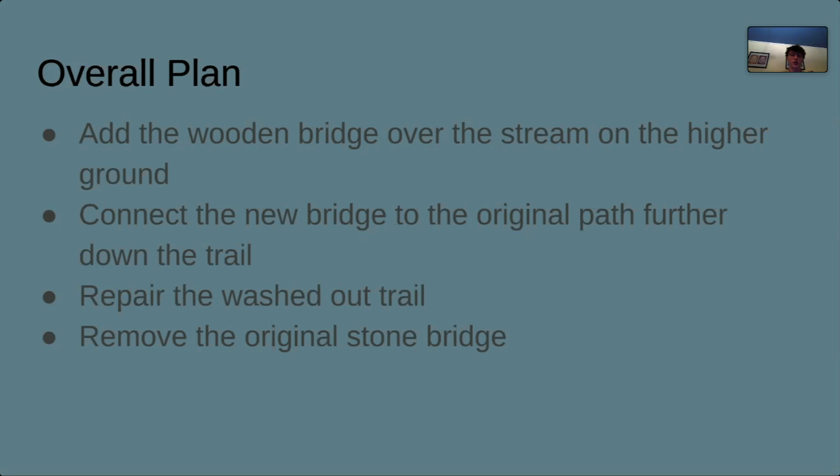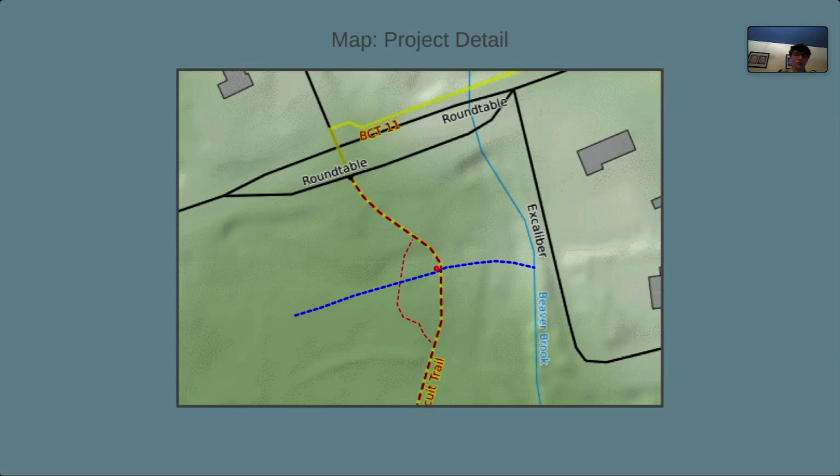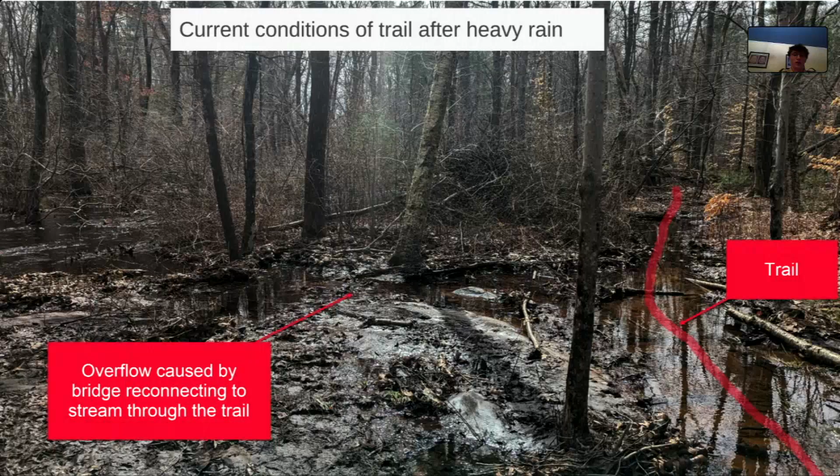This is back to the old picture, just roughly where my bridge would be placed. And this is from where our bridge is going to be placed.

We'll have footings on every spot where there's going to be new stringers placed in to support those. We'll have the gabion connected to these footings by rebar, and then the gabion will be set a decent bit into the ground to make sure it stays on sturdy ground, not just the nutrient-filled ground.

And it's not going to be placed on the actual banks. It should just be staying on where it's been flooded. And once we remove the old stone bridge, that shouldn't even happen anymore because it shouldn't be flooding.

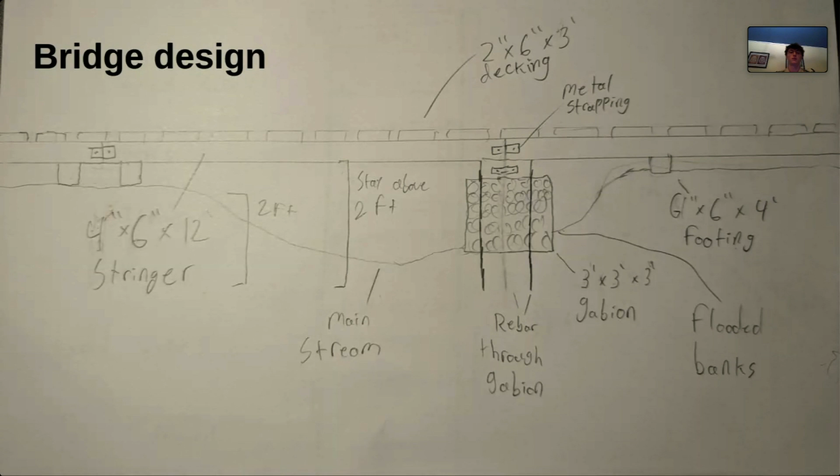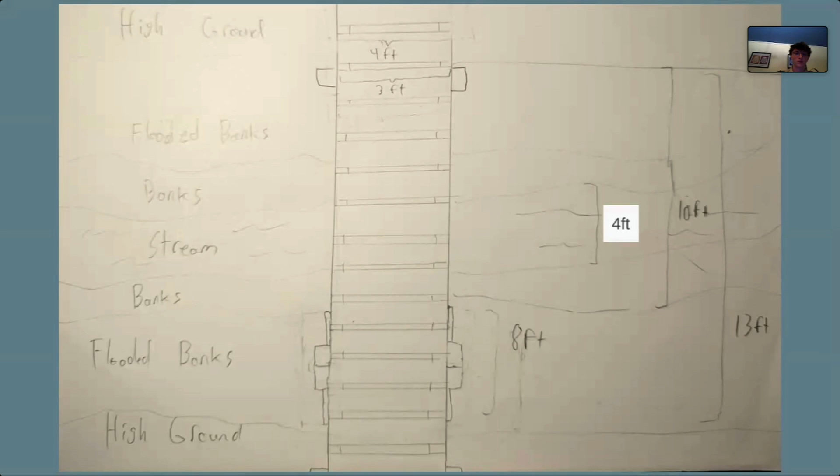We'll be trying to help connect and repair the trail. Because the original trail has been destroyed, I'll have to create a short section. It shouldn't be too far, we won't have to change much of the terrain.

To repair the old section that's been washed out, we'll just be covering it with stuff from around the area, like sticks and logs, to try to let it grow back on its own, unless you want me to do something specific with that area.

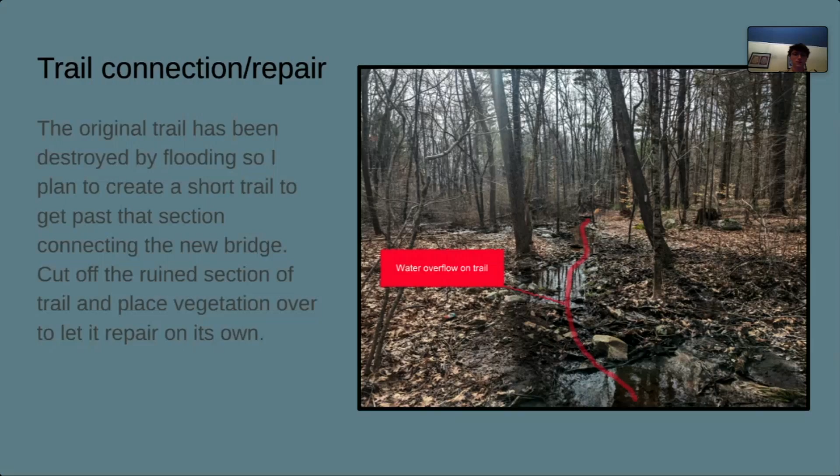To deconstruct the bridge, we'll try to use a block and tackle to remove the much larger rocks, because there are some pretty heavy rocks. And if that doesn't work, we'll use a pry bar or a hammer to try to get them out of the way and then wheel them away.

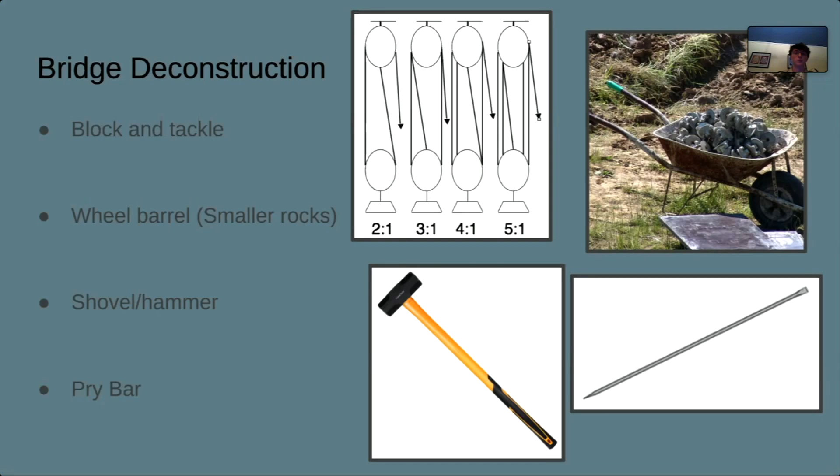Are there any questions?

Thank you, Nate, that was a really comprehensive presentation. My questions were really mostly about the schematics last time we saw you. Thank you for putting that together. I think I understand what you're proposing, and I think it's much needed in that area.

Jennifer, any staff comment on this? No, it's an excellent project. That existing stream crossing, where the bridge is just too small, is backing up all the water and causing a lot of erosion. So this is very much needed, and we appreciate you taking on this project.

Comments or questions from other members of the commission? Any public comment here for 10R Roundtable Road trail repair? All right, seeing none, I'm going to make a motion to close the public hearing for 10R Roundtable Road.

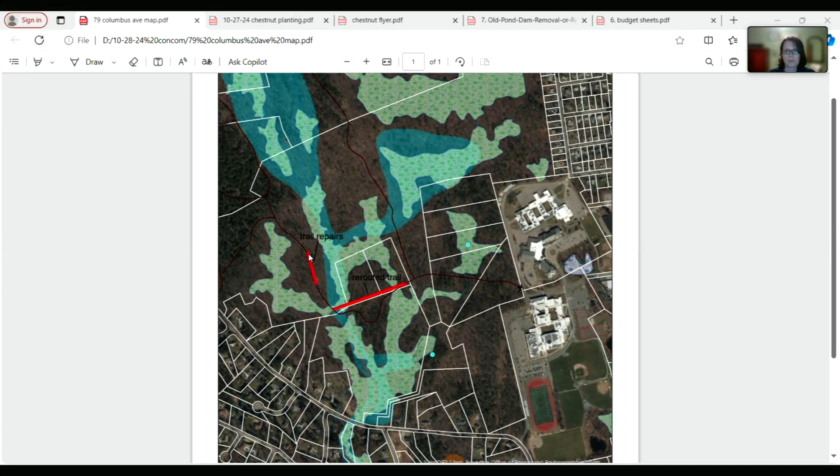This is the section where we'll need a machine to help us, and there's another section closer to Randall Street where it's really muddy. So we need either some boardwalk or puncheons, something to help people stay out of the water to prevent the creep happening on the side. People don't want to walk in the mud and they keep edging out further and further.

So those are the two projects for us.

One bucket at a time or trailer? Well, we can allow temporary motorized access with small vehicles to do the work. We've done that on occasion with a number of the scout projects, just to get the materials there, and after that it's back to non-motorized. Yeah, no, it's needed here. I was more just curious.

Questions or comments from other members of the commission? I think this will go a long way towards making that a little bit more accessible.

Any questions or comments from members of the public? Anybody? Nope. Okay, all right, seeing none, motion to close the public hearing for 79 Columbus.

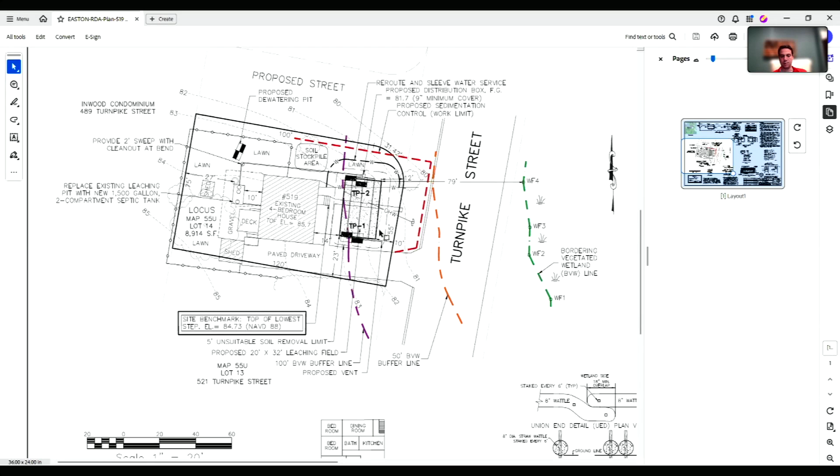Questions, comments from other members of the commission? All right, seeing none, any public comment here for 519 Turnpike?

All right, seeing none, motion to close the public hearing for 519 Turnpike Street. Carol motion, Vecchio second, roll call vote. Benson, aye. Carol, aye. Rossman, aye. Spady, aye. Vecchio, aye.

Motion for a -2 and -3 under the Wetlands Protection Act and a -3 under the bylaw. Carol motion, Vecchio second, roll call vote. Benson, aye. Carol, aye. Rossman, aye. Spady, aye. Vecchio, aye.

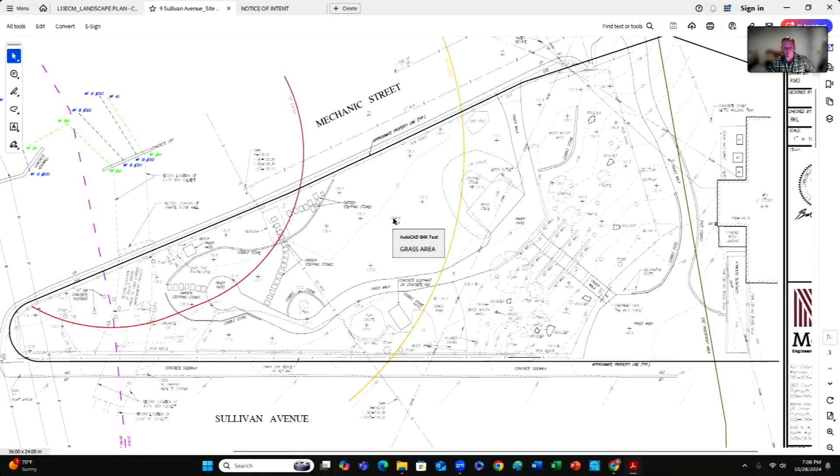When we add degraded riverfront, we have to mitigate that, and that was kind of a challenge in the beginning. We were able to put some draft plans together, and Jennifer took a lot of time and helped us craft the design we're at now. It sounds simple, but when you're adding a playground surface, is that degraded, or do you need wood mulch, or soil? That was the challenge we wound up with. So that's the existing conditions plan.

Let's see, this is the proposed conditions plan. Mainly the main walkways are staying, with some revisions to stone pathways. The playground equipment is now proposed, which would be on a wood chip mulch and soil underneath, so that doesn't create a new degraded area.

But one other aspect that was more difficult, but a great site improvement, is that we need to control the stormwater on the site. So there are 2 rain gardens proposed, one here and one here, that would all use native plantings, and also a roof infiltration system here, which is also going to collect the roof water runoff from the building and infiltrate it into the ground.

So we are improving the stormwater on the site, because this isn't an exemption. It's not a single family home. It's more commercial playground, but we still have to meet the Massachusetts stormwater standards. So we have done that.

All the plantings on the site are proposed to be native, and I'll bring up the landscape plan. So there is approximately an increase of approximately 2,055 square feet of new degraded riverfront that consists of areas that don't contain topsoil, so new hardscape.

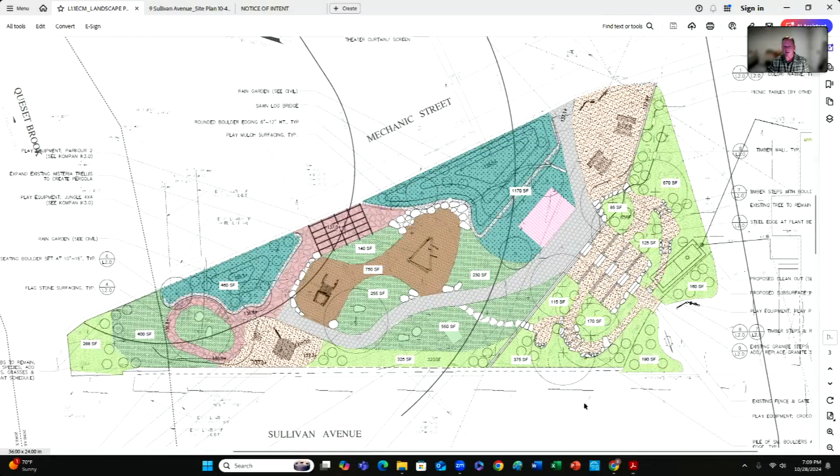Can I just ask, in the rain gardens, is that being counted towards mitigation? It isn't. We have the 2-to-1 ratio plantings to make that in compliance. I included the stormwater as an improvement, just a general site improvement, but not something that we're counting for to comply with the riverfront regs.

Okay, really appreciated the notes on redevelopment as well. Sure.

So, Nick, could you walk us through stormwater? Yep. So Nick Courtney with Merrill Engineers and Land Surveyors.

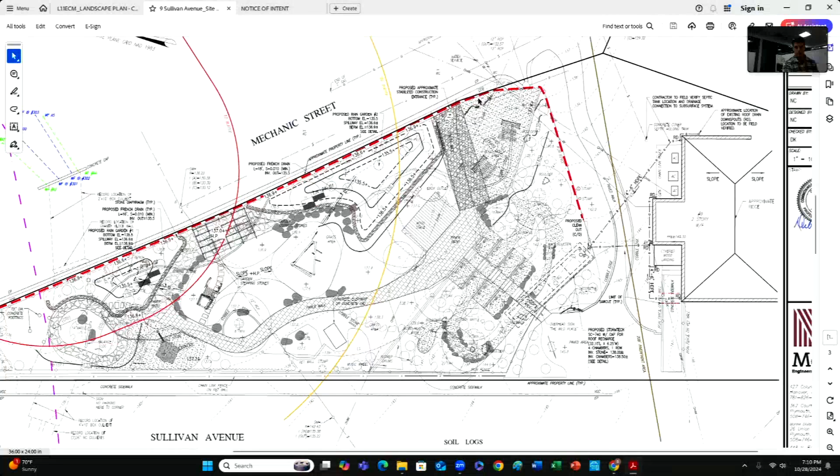Nick, would you like me to stop sharing and you can pull it up if that helps? Sure, yeah, I have it on my screen right now. Great, I don't want to drive the bus. Can everyone see my screen right now? Yep, okay.

So for this project, our main goal was to kind of keep the theme of the playground with plantings to be included for the stormwater. So we wanted to focus on getting some type of rain gardens in there. For pre-treatment, we're doing stone diaphragm, so all the new proposed impervious areas and existing impervious areas will flow towards those stone diaphragms for pre-treatment and then overflow into the rain gardens.

The reason we are proposing the subsurface infiltration systems is because groundwater is relatively high on the site, so we couldn't take recharge in the rain gardens. So we're just taking recharge from that existing roof instead.

The only thing, so for peak rates, 2-year, 10-year, 25-year are met. Relatively low CFS for the site. 100-year is close, but after looking in HydroCAD, there's no additional flooding that would happen in the 100-year. The proposed conditions in terms of volume is less than the existing.

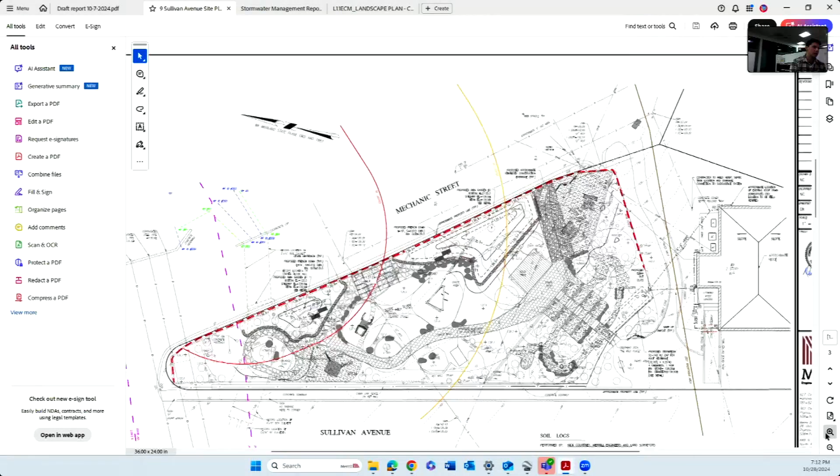We also have, and here you can see, I'm going to zoom in a little bit. These two areas here are French drains. They're going to run underground. Due to this mulch area being a little bit lower, any stormwater that goes towards that area is going to infiltrate and then run through a French drain into the rain garden.

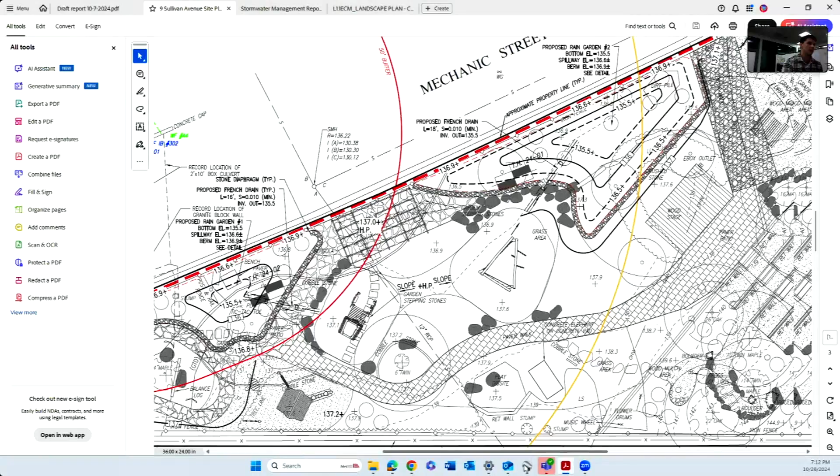And yeah, that's all I have for right now. Feel free to ask any questions. Thank you.

So Jen, I think we got 2 DEP comments on this. Would you mind just raising where those stand? For me or for Brad? I guess for whoever has them.

Yeah, I think I'll jump in quick. One of them was not to count the stormwater management as mitigation, which we haven't. Yep, and I can't remember what the other one was. Sorry, Jen, just demonstrating compliance with the redevelopment section of Riverfront, which you did. You explained it to us.

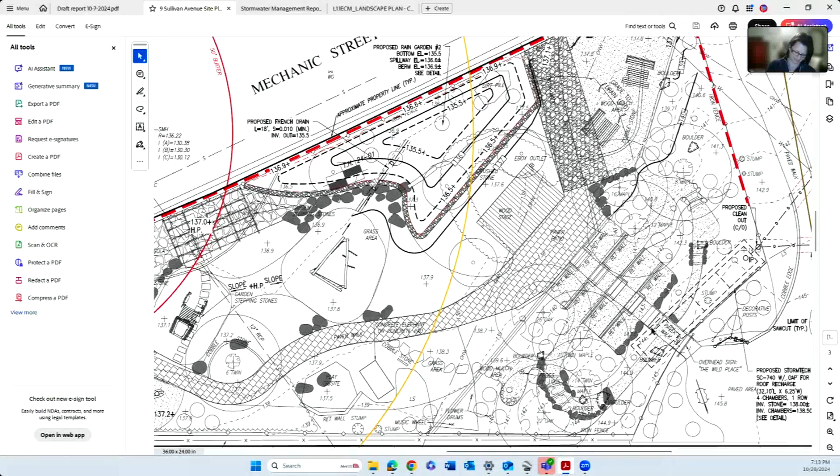Ben, did you want me to jump? Yeah, that's where I was going. Okay. We actually have all the information that you need in order to close tonight and make a decision.

Great. Their mitigation, even though it's not counted in the calculations, the stormwater management is an improvement over existing conditions, which helps meet the criteria. And there is invasive species removal - there's a lot of Japanese knotweed that they will be removing as part of this project, and the mitigation plantings do meet the requirements. So it's a good project, thank you for pulling everything together as we discussed in the past. We don't have any other comments for them.

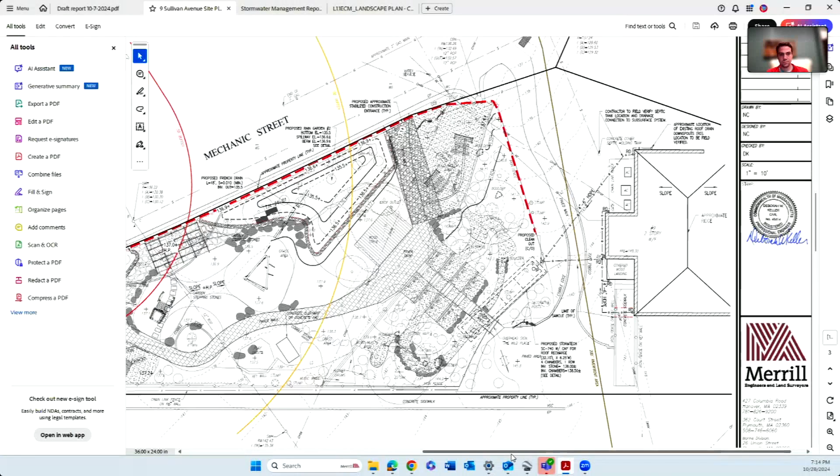Thank you. Questions or comments from other members of the commission? All right, seeing none, any public comment here for 9 Sullivan Ave? All right, seeing none, I assume you'd like to close tonight? Yes, thank you. Absolutely. Motion to close the public hearing for 9 Sullivan Ave. Well, we have one comment. Okay, yeah, I'll promote them.

Hi, I was just wondering if the transcript and the recordings will be made available afterwards. I think usually the recordings are broadcast on ECAT. I've never been asked if you can get a copy of the transcript. Jennifer, do you know the answer to that? We don't usually take a transcript, but people at ECAT might be able to answer that. Okay, wonderful. Thank you. Thank you.

All right, any additional public comment for 9 Sullivan Ave? Seeing none, motion to close the public hearing for 9 Sullivan Ave. Spady, second. Carol motion, Spady a second, roll call vote. Benson, aye. Carol, aye. Crossman, aye. Spady, aye. Vecchio, aye. Motion to issue an order of conditions and permit for work for 9 Sullivan Ave.

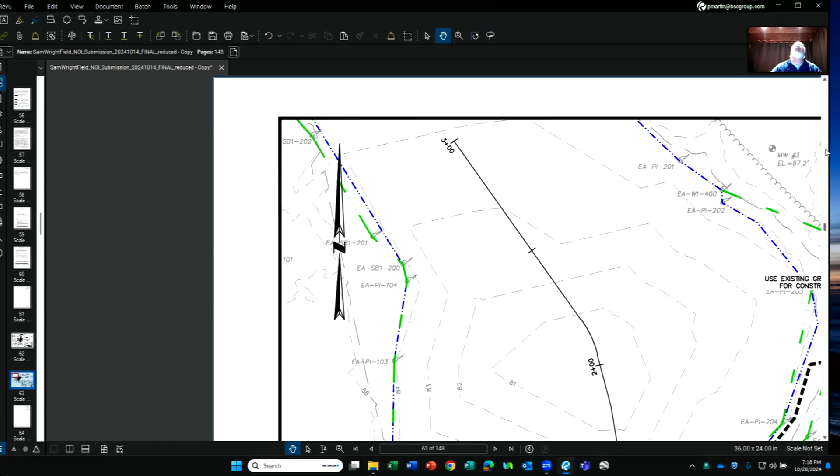I'm trying to get to the dang plan here. Wow. Attachment B. B, okay. Make this a little smaller. All right, so this is the plan for the culvert removal work.

So right now, there is a pond created by an earthen berm, two corrugated metal pipes, and a reinforced concrete pipe that are shown here. There is a concrete head wall. There has been, under high flow events, some bypass of the culverts, so there's a little bit of erosion of the earthen berm over here. One of the culverts is at least partially collapsed. So this whole thing creates a hydraulic restriction that is responsible for having created the pond.

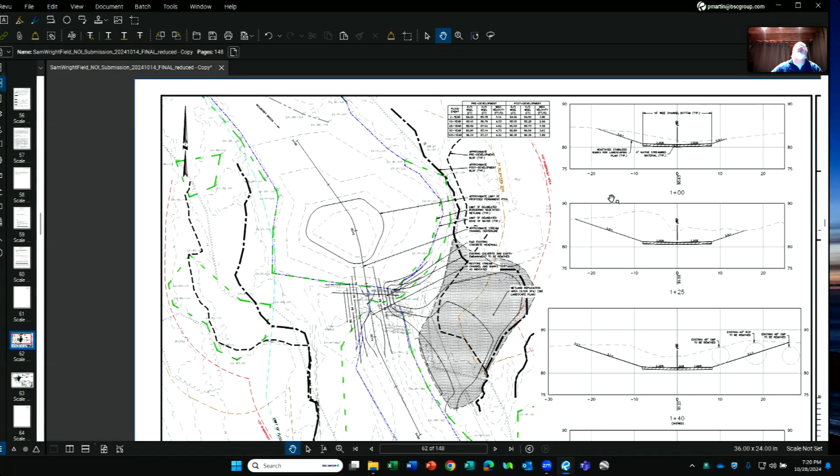I'm sure it was a farm pond that the farmer used for various purposes. It is starting to slowly fill in and take the natural path of eutrophication. So what we're proposing is to remove the culverts, the concrete wall, and reshape the earthen berm to basically have contours over here and contours over here with just a little bit of, I'm just looking at the profiles right here.

We'll take advantage of the current eroded portion of the earthen berm and slightly move over the main channel. And we will leave a little bit of a sill here, excuse me.

So we'll have a small pool within the stream. If you know stream terminology, streams are categorized as riffle, run, or pool. Riffle is rocky substrate with cascading water. Run is faster flowing but relatively laminar, smooth flow. Pools are deeper areas with more sluggish flow.

The idea is to have a little bit of a deeper water refuge, only about 18 to 20 inches deep. But in case there are drier times when the stream flow drops off, minnows and aquatic insect larvae could make their way into this pool and survive until the river flow comes back up.

So that's the culvert removal. In addition, we'll be reworking the bank down here a little bit. The wetland mitigation is proposed in this area.

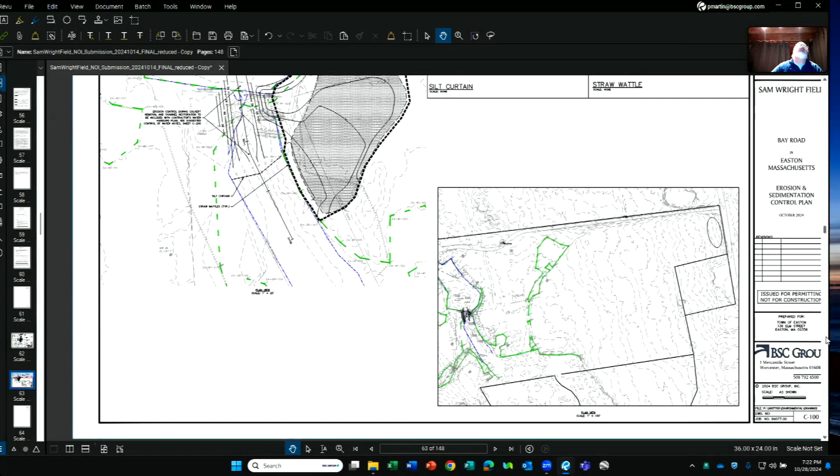Let me go to the sheets that show that detail—oh, here's some photos. I don't know how many people have gone for a walk out here with their dogs, but it's a really nice parcel.

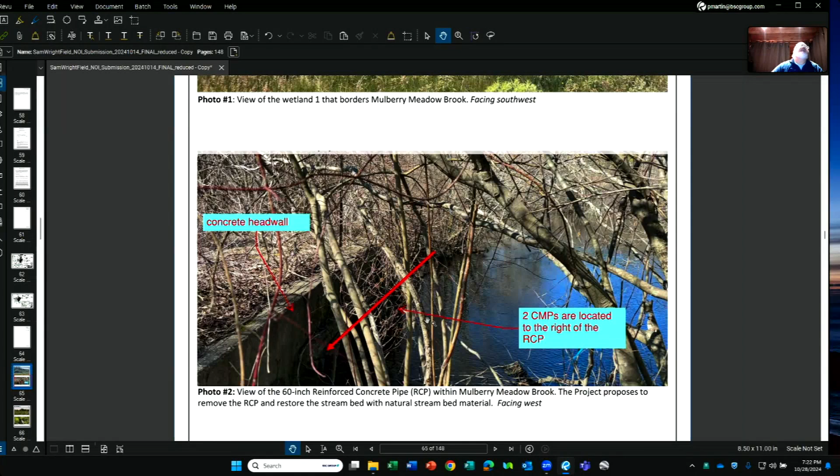So here you can see the concrete head wall. One of the pipes is over here, and there's a couple over here, and that overflow channel is over here. This is upstream of the culvert areas—you can see the pond is starting to fill in.

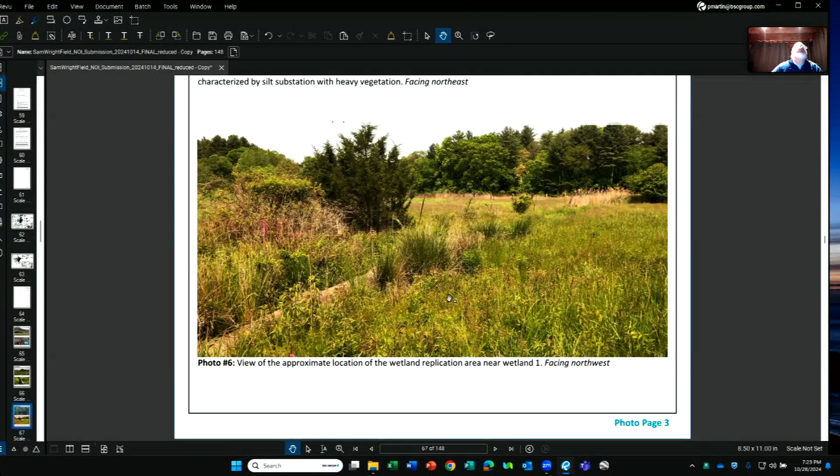It tends to be 15 to 16 feet wide. The pond is over here, and the wetland replication area is proposed next to it. Our monitoring of groundwater levels suggests that 2 to 3 feet of soil needs to be removed. And we do have a planting plan.

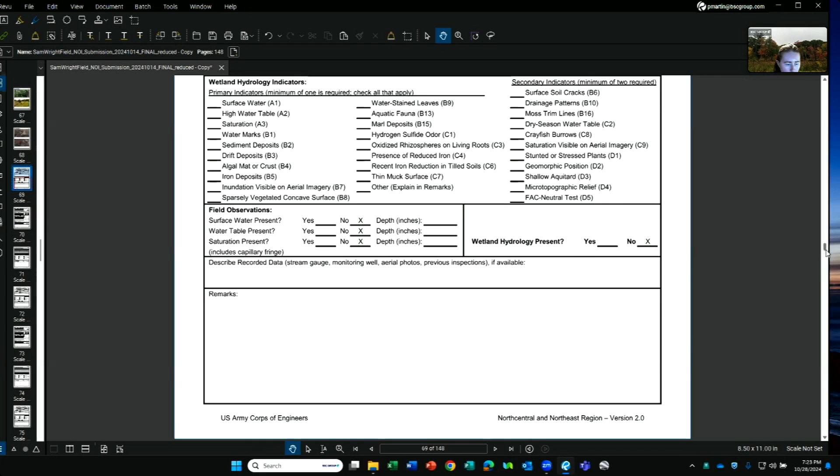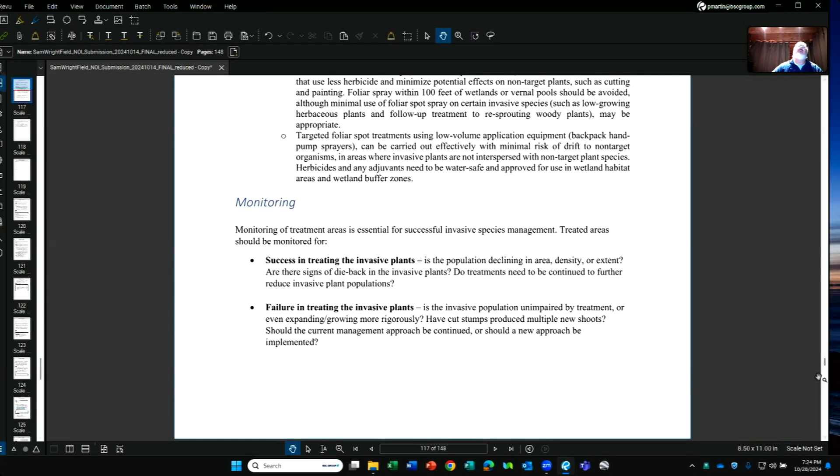And where's that? Attachment F. Way down here? No, it's above—it's right below the ACEC map. Ah, yeah, you're too far. It's turned into a big NOI filing.

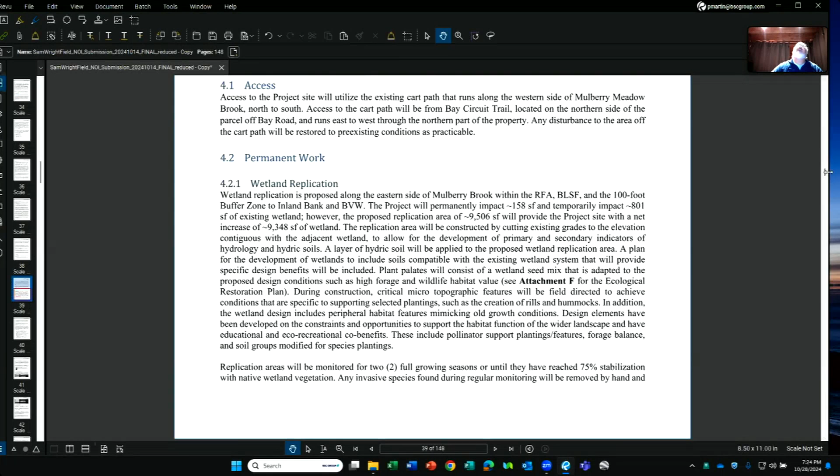Anyway, while I look for that—we did take advantage of Attachment A that comes with an ecological restoration form and filled that out. We talked with Fish and Wildlife, and they said no time of year restriction would be needed.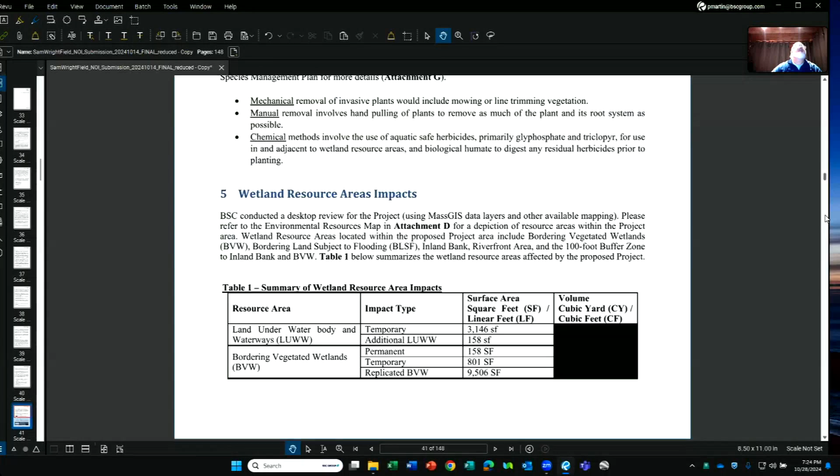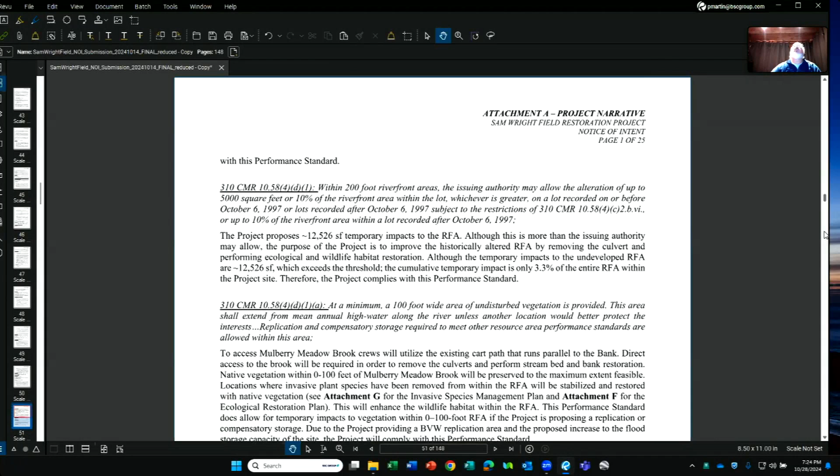We also have an invasive species management plan. When we were first approached about this project, Jennifer let us have a blank slate to come up with different ideas, and it turned into probably needing a phase 1 and a phase 2.

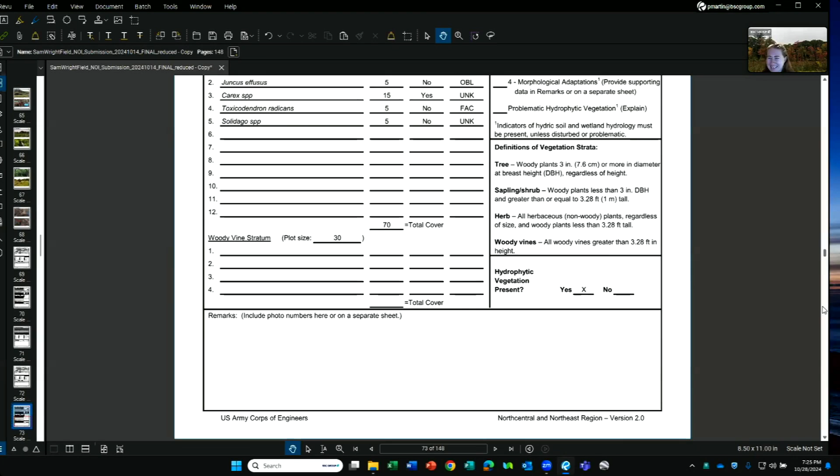It's page 90. Which page? Page 90. You're getting to it. It's easy to get lost. There you go, all right.

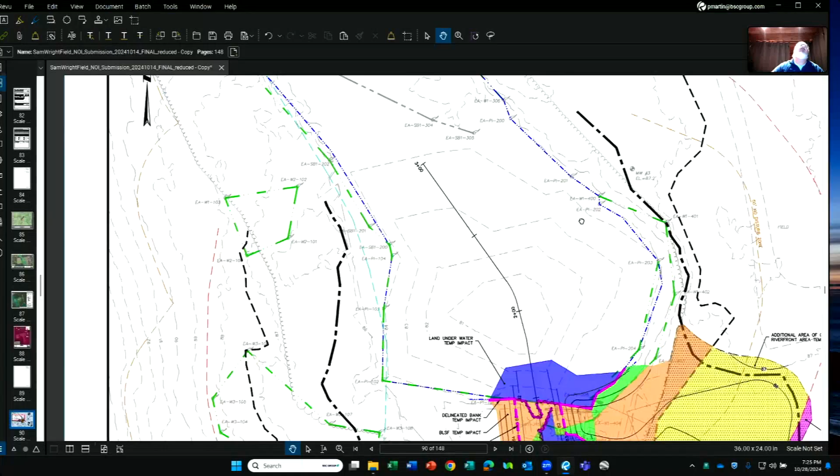So this shows some of the impact areas. The banks will be temporarily disturbed along here, but then restored. This is the mitigation area—in addition to being BVW, it will be lowered.

Enough to add some bordering land subject to flooding, additional compensatory storage. All right, here we go.

Does that seem like a huge mitigation area? This? No, that map you just had—I don't mean to make you change pages, but it seemed like a lot of mitigation. No, the mitigation is still just the stippled area.

Okay, thank you. And this is all area that will be temporarily disturbed to get equipment in here, or do the earth moving, pull the culverts. This will all be restored using native vegetation seed mixes. And the soil from here is proposed.

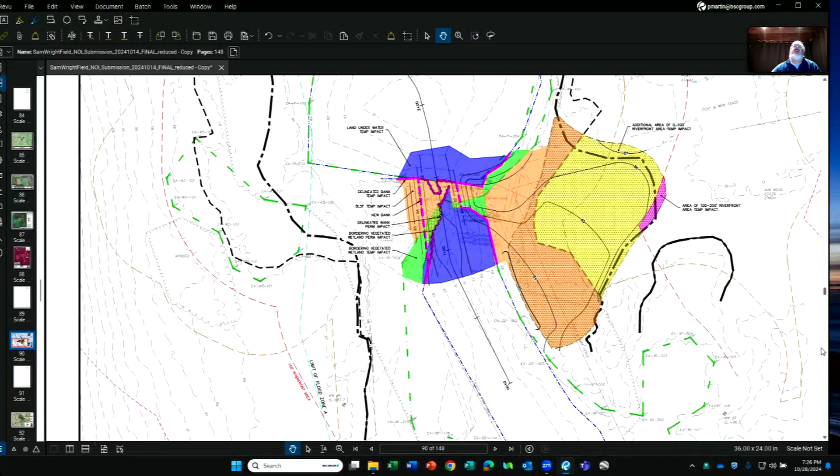I don't know, Jennifer, if you ever talked with the police about putting that berm up front, or whether they want a clear view onto the property. No, I need to do that. Yeah.

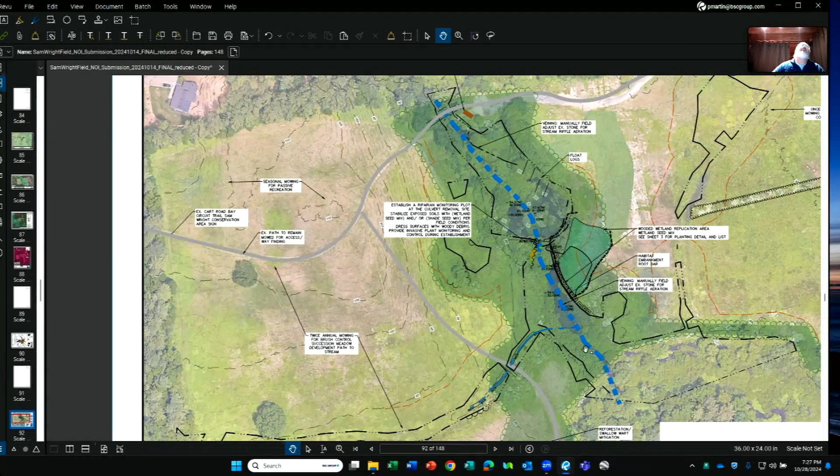So as I was saying, we had this blank slate, and initially we were looking at possible creation of grassland bird habitat, invasive species work, and a bunch of other things, but we've gotten it down to restoring the stream channel through here, creating BVW and BLSF.

You'll see we have some things like float logs, to create some riffle aeration in the stream since we're working in this area. The root bars are like stumps that you embed the tree part into the ground, with the root wad sticking along the stream bank. It creates habitat and helps address longer term erosion issues.

I think that's the main elements. I don't know if you're familiar with a prior project, but the barn and house and other disturbed areas—a lot of concrete was removed from this area several years ago, and the grade was brought down to also create BLSF compensatory storage in this green shaded area.

So this is a continuation of removing evidence of the old farm and returning this to a more natural state. I don't want to talk about the phase 2 stuff because it's not necessarily Wetlands Protection Act related—this shows, if the police are okay, we were thinking of taking the excess soil from here. This wouldn't be in your jurisdiction per se, but creating a little bit of an earthen berm and some woody plantings to create a nighttime light and noise barrier, allowing this to become a little less disturbed by the traveling public.

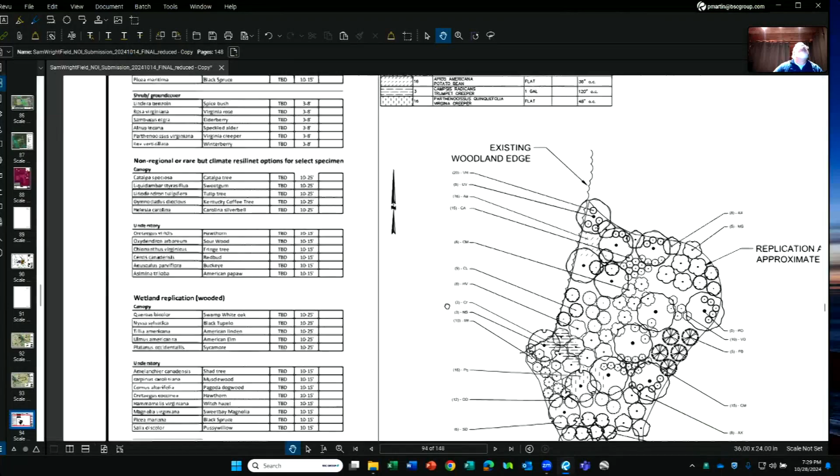The numbers for what's all created is in the form, and I don't have those all memorized. There are details about the species for the seed mix. The planting plan shows the spacing of the different kinds of plants for the BVW. There's some specs here for root wads and other features, and how to do some of the plantings.

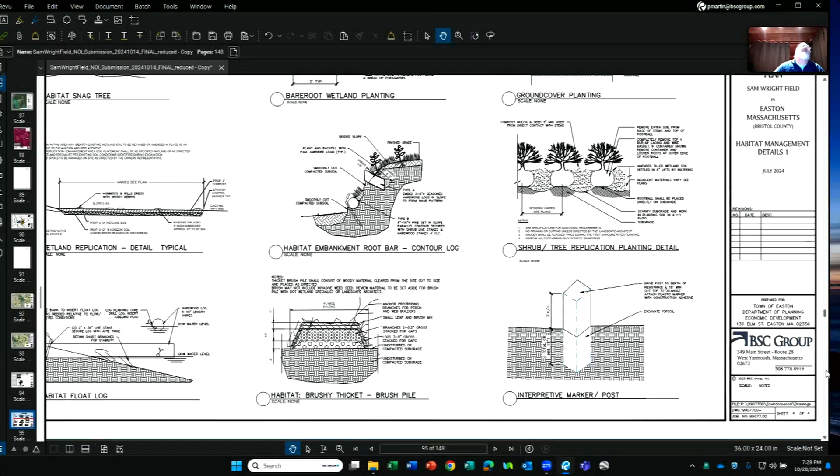Casey Lee, our landscape architect who designed this, has probably done 24 wetland mitigation designs in Massachusetts. And I'll stop talking because I think I'm only supposed to take 15 minutes.

I don't know, Jenna, feel free to add or put some flavor on it from your perspective, since we've been working with you for a year and a half.

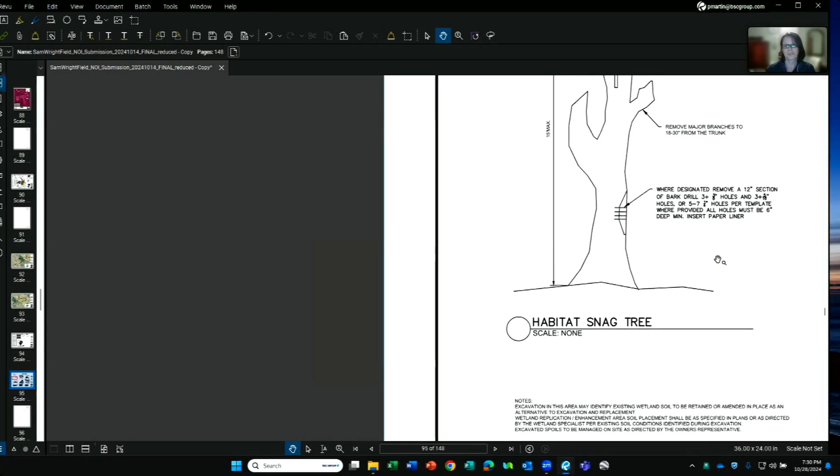You started to explain that this was an ongoing project. This is something that had been started before I came to the town more than three years ago, so it's a continuation of that project to restore the habitat values and the ecosystem on the property. Like you said, the buildings have been removed.

A couple of years ago, we received a grant from the Municipal Vulnerability Preparedness Program to remove that soil in the floodplain area. This project is to restore the natural stream functions and improve migration for aquatic species. Phase 2 would include more invasive species removal and habitat management.

Paul, do you know what other permits we are required to get after this one? We're going to have to get a Section 404 permit from the Army Corps of Engineers.

I think our impacts are below the level where we can just file an SV. Under the general conditions of the general permits, the order of conditions can serve as the 401 water quality certificate, so we won't need to file an individual application for that. And because we're removing structures from a water body, there's no Chapter 91 - we're not adding anything to the stream channel.

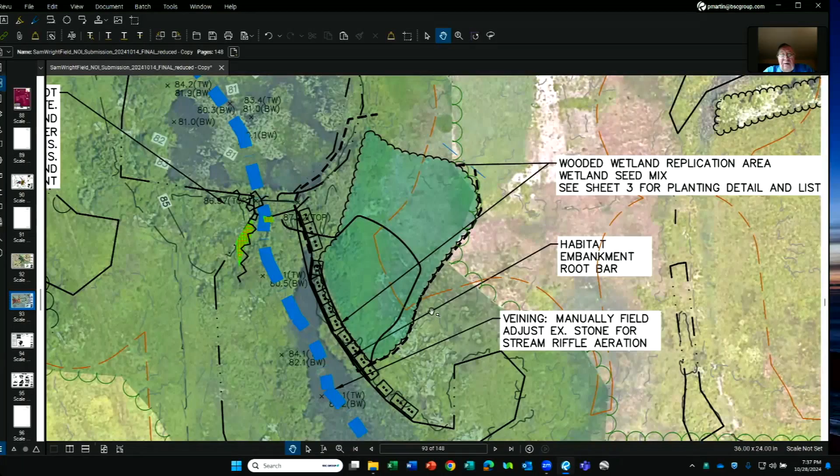Sounds like there's going to be a number of trees removed, and I'm wondering if you couldn't replace some of those trees with chestnuts in the area. It looks like a good place for them if you're trying to rehabilitate the wildlife and be a good food source down the road.

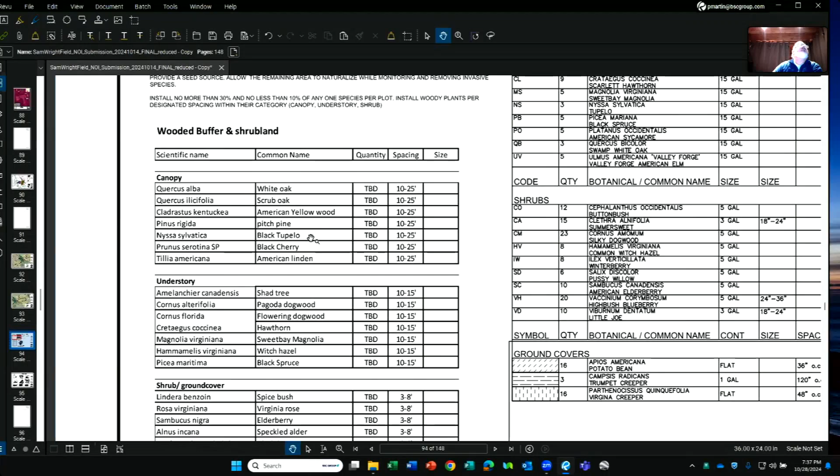Yeah, I mean, we do have already, let's go to the planting list. These are some of the tree species: white oak, scrub, yellowwood, pitch pine, tupelo, cherry. And then we could certainly

accept a condition in the order of conditions. It says target the planting of whatever, 4 or 6, however many, and we can fit that into the arrangement.

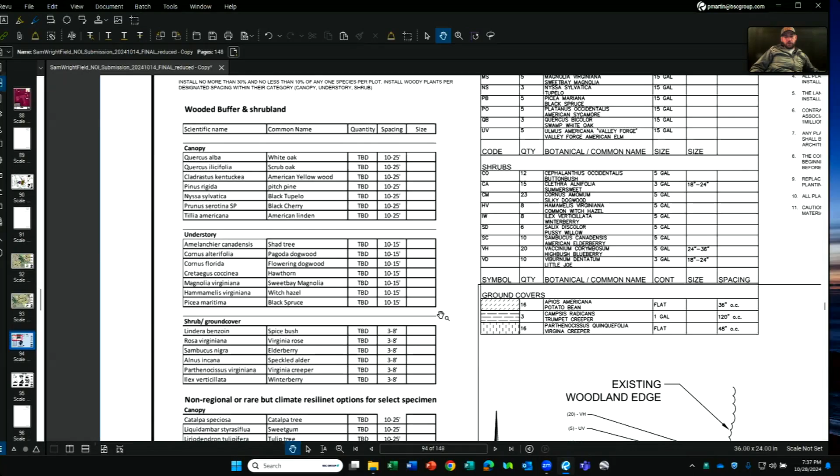That'd be great, thank you. Yeah, sure. And Al, too, just so you know, I kind of had this location pinpointed for my next planting of chestnuts, so this is also in my sight. So whatever needs to be done is kind of going to happen that way. So it's headed there. Good, good.

Questions or comments from any other members of the commission? Paul, you may want to keep that page open, but I'm going to stop sharing so we can see each other when we're commenting in case any other abutters have comments too. But you might have to share your screen again. Just don't close your page.

Okay, seeing no additional comments or questions from the commission, any public comment here for 445 Bay Road? I take it no one? Okay, motion to close the public hearing for 445 Bay Road.

Benson, second. Carol motion, Benson second, roll call vote. Benson aye, Carol aye, Crossman aye, Spady aye, Vecchio aye. Motion to issue an order of conditions and permit for work at 445 Bay Road, noting the potential addition of appropriate chestnut species.

Crossman aye, Carol motion. You know what I meant. We got you. Carol motion, Crossman second, roll call vote. Benson aye, Carol aye, Crossman aye, Spady aye, Vecchio aye.

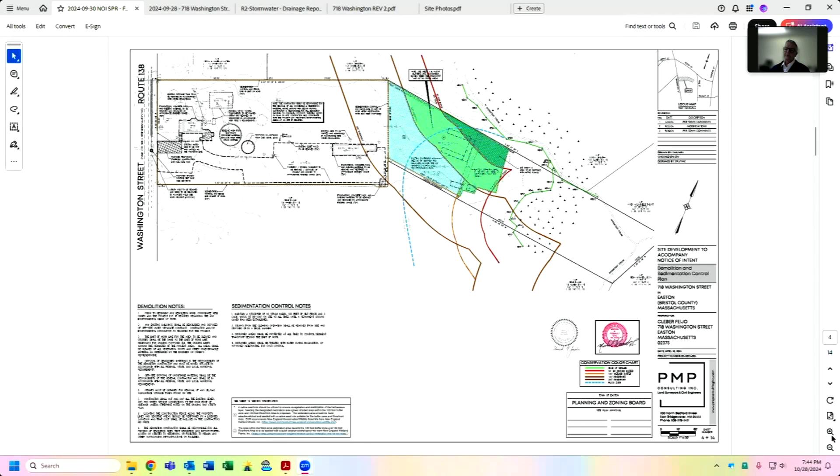This is the demolition and sedimentation control plan. You can see the different shaded areas. Light blue would be the area between the 100 and 200 foot riverfront. The area in light green is between the 50 and 100 foot wetlands. And then the dark green is the restoration area inside the 50 foot buffer.

Sammy, why don't we go to layout materials for a second? So that's what's being proposed, that 15,000 square foot building. It's 10 units in there, with associated parking. We meet the parking requirement. There'll be one space in every garage, and then we have 10 spaces down below. Although I just noticed tonight before we came on that there's really only 9 spaces below, so we're gonna have to add a space down there. We do have room for that - we can just move the handicap space over one space. We have 8 truck parking areas down in the right-hand corner of the project.

Sammy, go down to the rest of the landscape plan. So this is what it would look like when the project is finished. All the restoration areas would be done. As you can see, there'll be a fence going - a post and rail fence going along the back - that'll be the limit of work. All of the proposed design work is outside that 100-foot riverfront. We have a driveway going down for maintenance, 10-foot wide, but it will have a gate so that it can be locked. That's just to do any maintenance within 10 feet of the retaining walls for the drainage structures.

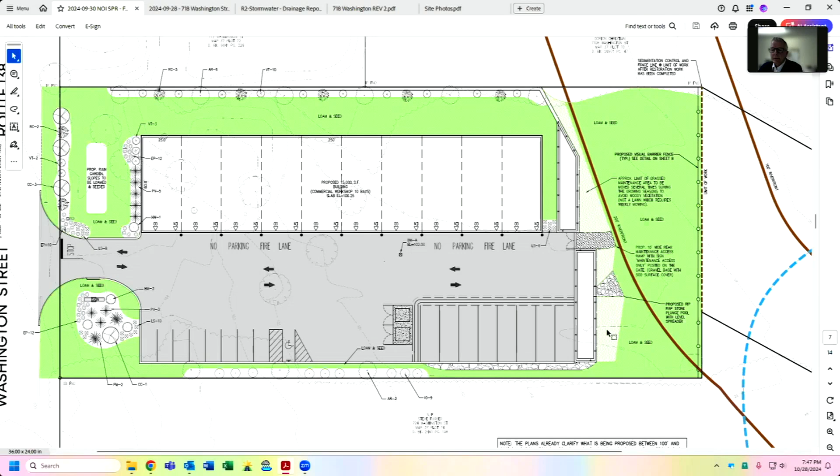Let's go down a little bit more, Sammy, to the restoration plans. I think they're right at the very end, sheets 13 and 14.

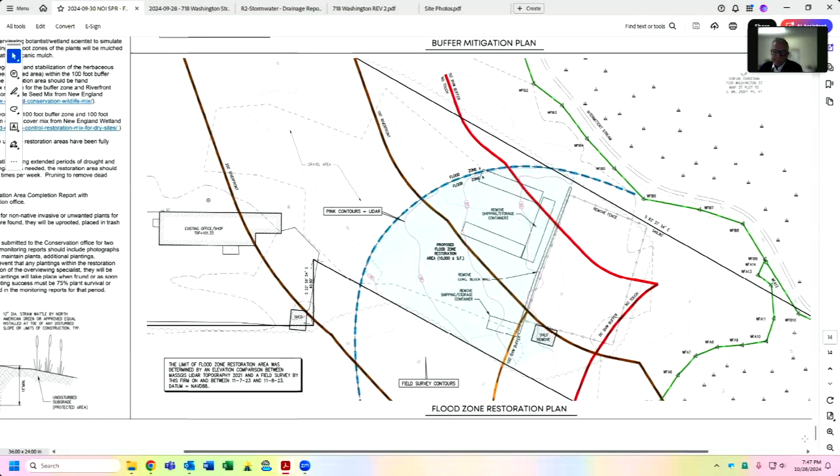Yeah, keep going. There we go. So this is what is being proposed for restoration.

In the 50-foot buffer zone, we have a planting list, and then in the 50 to 100, we have a seed mix. I think the seed mix list is on sheet 7. It shows what kind of mix they're going to use inside the 50, and between the 100 and the 200.

If you go down to the bottom a little more, Sammy, we show the area to be brought back to grade within the flood zone. What we did there is we took the LiDAR off of MassGIS from 2021 and superimposed that onto our project, tracing the old contours from 2021 to get those old grades back in. Those have been staked in the field to guide the construction guys in grading that properly. As I said, it's probably about 6 inches below that right now, and they're going to bring that up to grade with loam and seed.

So that's about it. I'll answer any questions that you have that I can answer. As I said, I won't be able to answer any stormwater management questions tonight, unfortunately, but I can bring your concerns back to Mr. Perot. I think the majority of our questions tonight had to do with stormwater.

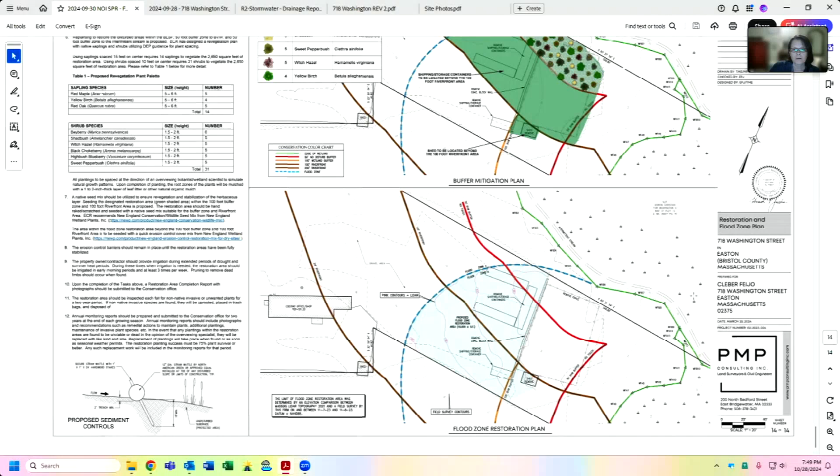Go back up to another the grading — actually you could stay on that one, the green one, that landscape one. Okay, this is something that's been brought up a few times. The whole riverfront area was supposed to have been restored. This plan shows a portion of the riverfront area is grassed and clearly altered, so it needs to be added to the permit application and describe compliance with the bylaw under riverfront area.

The relocated buildings would also need to be shown on the plan because they are still within the riverfront area, and you want to show that they are not within the floodplain. Okay.

Those were comments we made quite a while ago, so I kind of thought we would have that answer for this meeting. Well, the buildings have been moved out of the riverfront area. They're way up beside the building that remains on the site, pushed way up beside that now. Okay, and once this building is constructed, those won't be on the site any longer — they'll be removed from the site. Yes, completely. What building are you talking about?

Let's talk about the container. The container — yeah, it's already moved out. Yeah, it'll be removed. Okay.

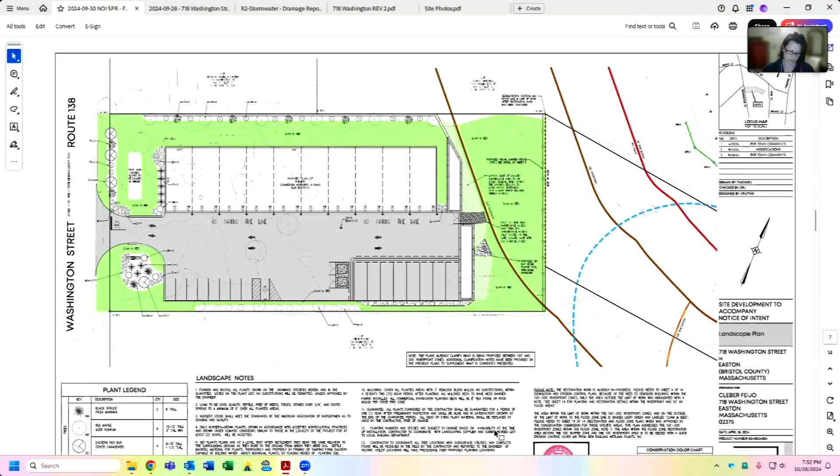Okay, so those are portions of the bylaw that do need to be addressed. There are a number of stormwater comments that our peer reviewer, John Chesia, will probably bring up, but I don't know how useful that's going to be if Mike is not here.

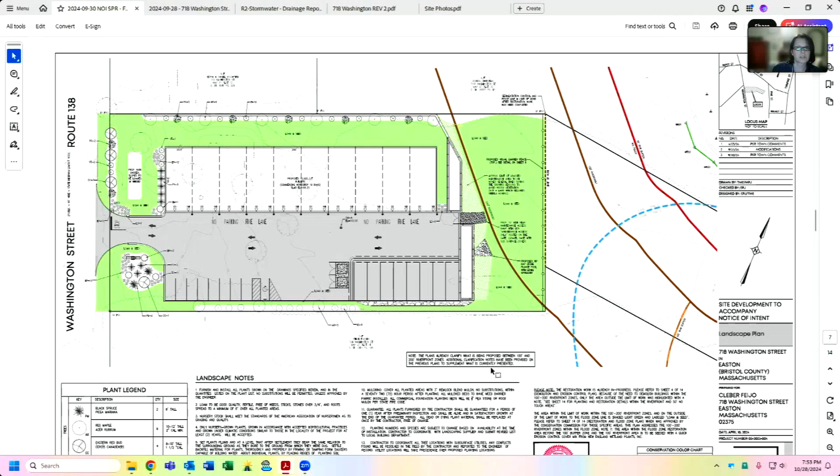We did have a meeting in the office to discuss the comments from John, and it doesn't look like anything's been revised since that meeting — is that correct? Well, I read through the letter. I think John could comment on that, but it looks like some of them have been addressed, though there are still outstanding issues. Okay, so can I stop sharing and then we'll ask John if he has some comments?

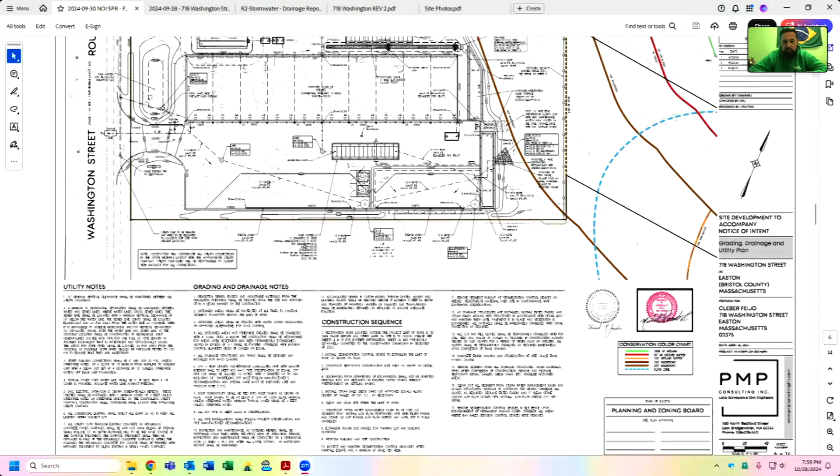Yeah, it doesn't mean you can't do work within the 200-foot area. It means you're required to get permits for it. So if you need, you're already proposing to go into the riverfront area for, we don't know what purpose because it doesn't show on the plan, but if you're going to go into that area anyway, then why not make the basins according to the handbook there?

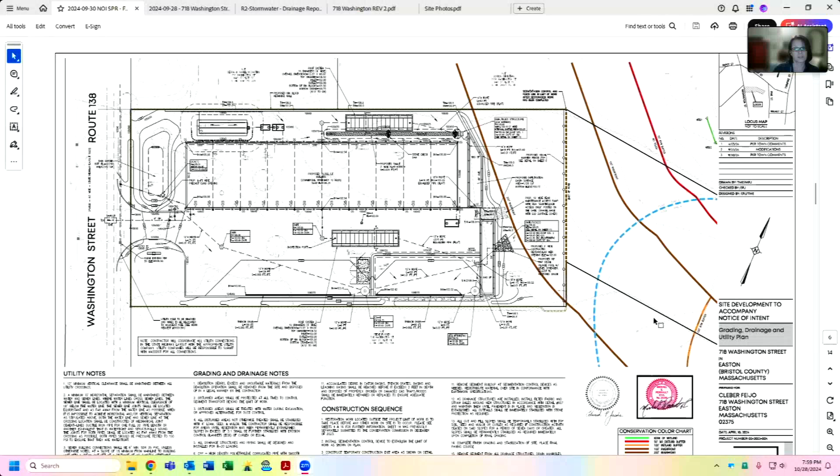My question I have, Samantha, can you go on the page at the top, please? The demo plan. Do you see over here the line that's almost halfway in the building? Yep, that's the existing building, the 200-foot path. That's what do you want me to do for this existing building over here now? Does it have to be knocked down to be compliant?

Well, that building doesn't show on your new plan. So I think what he's asking, Jennifer, that's the existing plan, that's the existing building. For the restoration area, does the building have to come down? No, that wasn't, no. And it looks like you're going to be moving that anyway when you move forward with the project. So that doesn't have to come down now, no.

You don't have, all right. Can I do the line where I have the blue line over here, the dotted blue line where I have the blue shade, and leave this alone together with the project because I have this building over here? Yeah, I think he's asking if you can just do the work right now as we show it to the bottom of what's going to be the wall.

I'm not seeing a wall. I see a limit of work. Sorry, so small. Yeah, the limit of work over here. Yeah, so we can do the- If you're proposing to alter the area in the riverfront area up to the limit of work line, then yes, your restoration can stop at the limit of work line.

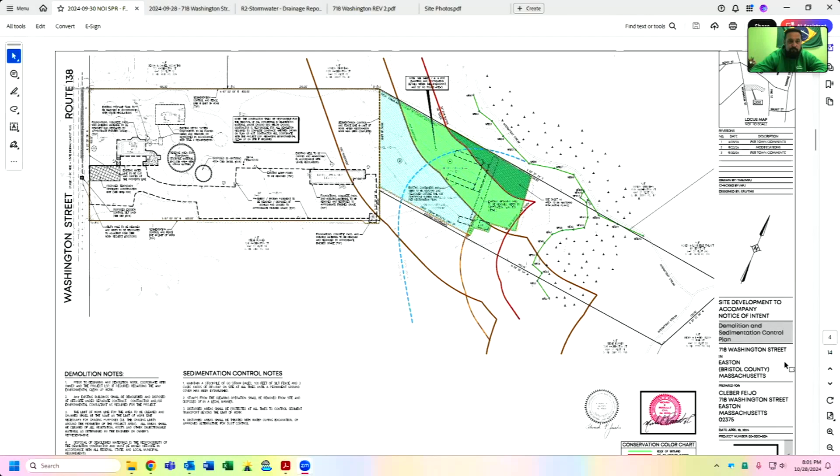Motion to continue 718 Washington Street to the November 25th, 2024 meeting of the Easton Conservation Commission. Second. Carol motion, Spadia second, roll call vote. Benson, aye. Carol, aye. Rossman, aye. Spadia, aye. Vecchio, aye. Thank you, everybody. Have a good night.

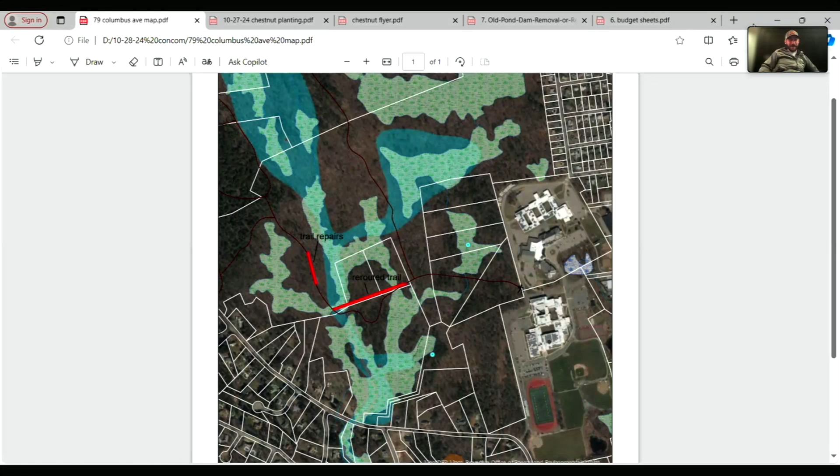You got them. No, hold on. Where is it? Now, don't hate me - I will say this because Dominic had to say this to me too. When I left after I did all this, he said, 'They're probably gonna die.' So just be cool with that. I'm letting you guys know I will be back to check on them, but they might die.

Is there anything we can do to help keep them going, or will we just see them in the picture? No, they're hard. Some take, some don't.

Oh, I don't know why I called it Clifford Grant - I have to fix this. Hey, they're gonna be there. I got so excited I wrote the Facebook post, and then Mike pointed it out, so we got that fixed quickly. I have to change this slide so you can see the plants here, very well protected with some screening and the orange fencing.

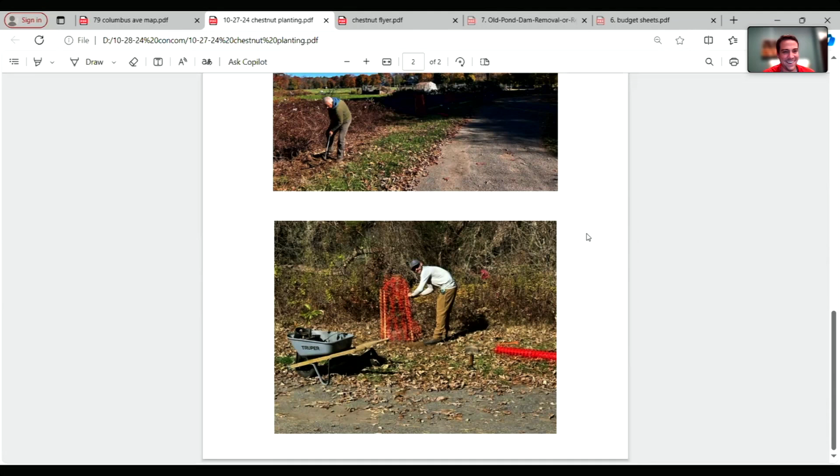Yep, looks great. Awesome, that's a great picture. Thanks to Mike and Dominic and Al, of course. Thanks to all of you.

So I plan to go install those. Just want to see if there's anything else. Nope, that was it, I don't need to show anything else. Great, awesome, thank you for doing all that.

Oh, you're very welcome. It's awesome, it's very exciting on the planting for the spring, we're gonna have a lot. It's exciting. I never really thought much about it until I just liked eating them. So Al, you've made it a love for me.

So do we need to go water them? They need to be watered. For right now, I'm not gonna lie, the soil where we dug was freaking perfect - it could not have been better. So I think they're gonna do fine. I will still go check them, might go throw some water on just for the sake of it, but I don't think we have to rush there and worry too much.

The watering bags should be in this week - yeah, we ordered watering bags. That will help us come the spring, and that's when I think we'll all be hands on deck. But for now, I think we're set to go.

Good, yeah, just worry about deer and rabbit, that's our pests. Too bad we couldn't put the beavers to work. Well, unless they become bodyguards, they're not going to help us any. I was just making another beaver joke - sorry, I'm done. They didn't get permits either, no.